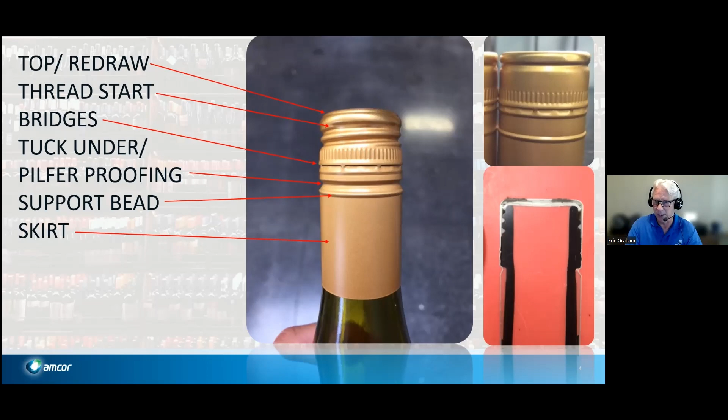Okay, now we'll get into a little bit of glass details. So in America, we have GPI. That's a committee of glass manufacturers all working together to make sure that they're working off the same specification. So the letter dimensions that I'm going to mention and the spec that I'm going to be referring to in this is the GPI spec for a 30 by 60 screw cap in a wine application.

There are many, many different glass specs for different applications and different size of caps. So this is by far the most common spec, and the 30 by 60 screw cap is by far the most common screw cap used in a wine application. So this is going to be geared toward that combination. Just to give you a general idea of what the specification looks like, the GPI 1680, that -3 is actually the revision number, and that's the newest revision that's out there.

You see that every dimension on the bottle has a letter designation assigned to it, and every one of those dimensions has a normal tolerance from the nominal dimension. And then on most of them, there's a second tolerance for maximum amount of ovality. So all of those things can affect the way the cap is applied.

A lot of where successful screw capping comes from is how well the cap is supported by the bottle inside it and how pronounced those details are on the bottle to give the cap something to hold on to as you're forming the cap around those details on the bottle.

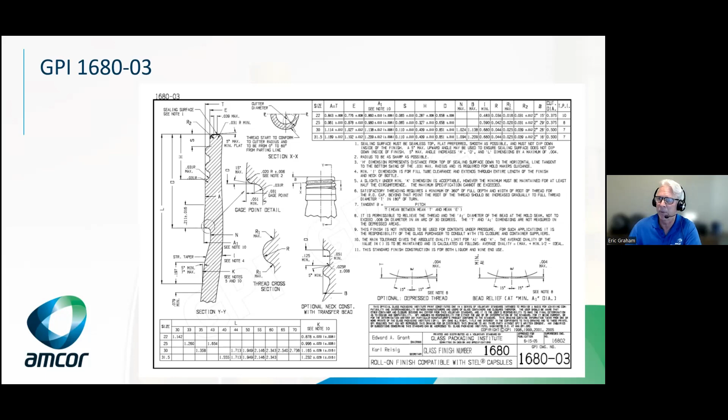So the S dimension, we mentioned the thread start earlier. So your capping head has the threading rollers set at a distance where the rollers are expecting to land directly under that thread start or S dimension on the bottle. But if you look at the GPI spec, the S dimension has a specification or a tolerance involved. So if your capping heads are set up a little on the tight side, let's say, or a little bit on the high side,

this is where you might see an issue where one production run, you have no issues, and then you change bottle or batch of caps, and then all of a sudden you're seeing cutting at the thread start. And that's because these details can move slightly. Typically, those tolerances are 8 or 10 thousandths of an inch, so they're relatively small. But if you're on the ragged edge of cutting and then something changes, then obviously that's where these type of issues show up.

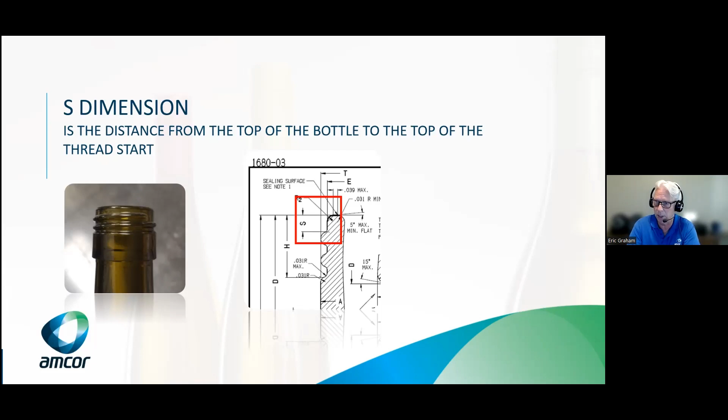So the next dimension is the D dimension. I'd say this is probably the one that glass manufacturers struggle with the most and cause our customers the most problems.

The D dimension is the distance from the top of the bottle down to where the tuck under happens. And so a lot of times this is what causes cutting in the tuck under groove. If that D dimension changes, again, your rollers are either too high or too low because the glass changed on you.

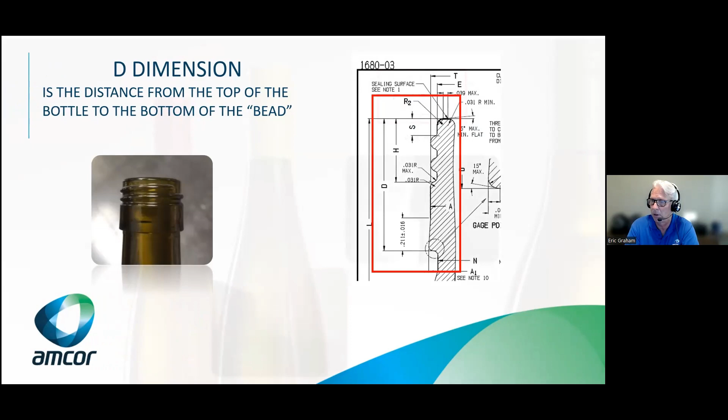Actually, I misspoke just a moment ago when I said the D dimension is the one that causes the most problems; the D angle is the one that causes the most problems. If you go back to the glass spec, they have a zoomed-in detail of this detail on the bottle. Basically, the D angle is the shelf that is formed for the cap to tuck under that ledge to hold the skirt onto the bottle when you open it.

When this 15-degree max dimension goes beyond 15 degrees, or this outside radius gets too rounded off, you can see on the right side of the screen an example of a picture from an optical comparator where that angle is well in excess of 20 degrees. It looks like 21, 22 degrees on the picture in the middle lower part of the screen.

What happens is no matter how well you form the cap and form that groove to lock it under the ledge, the bottle has provided a ramp for the cap to reform itself right back up and over that ledge. Instead of a nice square edge that the cap can hold onto well, that angle gets ramped out, and then you have what we call a pull-off. A pull-off is when you go to open the cap and the skirt does not stay locked to the bottle. The entire cap and skirt come off as one instead of the bridges breaking as they're intended to do.

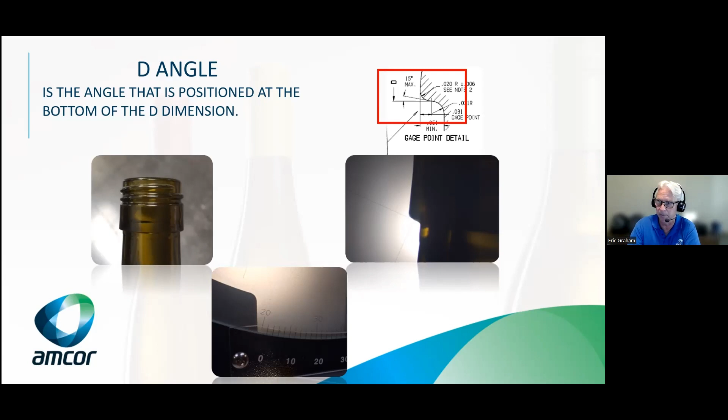The next one is the K dimension. This is a rarer glass defect or issue, but when it happens, a lot of times it catches people off guard and they don't properly identify it. If you see on the right, there's a pretty substantial gap between the neck of the bottle and the bottom of the screw cap where they meet.

That diameter of the neck of the bottle is the K diameter. In metric, it's 59.5 millimeters down from the top, basically the zone where the skirt of the cap meets the neck of the bottle. When that diameter is too large, it creates a lot of resistance that is felt in the opening torque; when you go to unscrew the cap, you feel that drag or friction created by the skirt of the screw cap being tight on the neck of the bottle.

Most people don't think about this, but when you start to open an aluminum screw cap, until the bridges break, the top and the bottom half turn together. So if that skirt is tight on the neck of the bottle, you feel that in the opening torque, the friction created by that neck being tight. So that's undesirable when it's too large.

In the extremes, the perforated part of the cap where the bridges are will actually invert, and the skirt will be tucked up underneath the cap, because when the cap is applied and all the downward pressure comes in from the top, the bottom of the skirt isn't able to scoot down the bottle. So the next weakest area of the cap is where that perforation is, and it basically just smashes the center part of the cap. Once you see it, you can't unsee it.

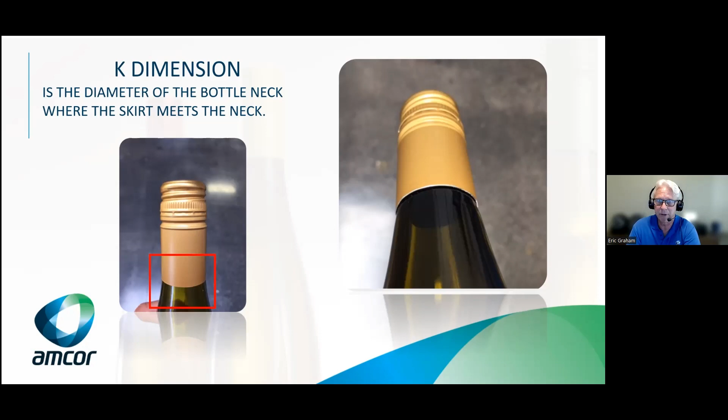When there's a K diameter issue, it almost always causes very high opening torques. The slip torque can be in the 20 to 25 inch-pound range instead of the normal, around 10. So it's pretty significant when this issue happens. On the other extreme, when the K diameter is too small, that can cause problems also, because the skirt needs support so the cap doesn't flex too much while it's being formed around those details on the bottle. If there's no support, the cap flexes, and then you can break bridges during application.

So, liner choices. Over the years, Amcor has developed many different liner choices, and this isn't even all inclusive. This is just talking about wine, not all the different versions available for spirits, which is a whole other category. Saranex and Saratin are by far the most popular. I would say Saranex is probably 80% of the liners that we sell in the wine market. The other close to 20% is Saratin, which is a tighter, lower OTR liner choice.

So you really have two choices, or two different ways of thinking as winemakers. If you have no concerns about reduction in your wine, or you know that the wine is going to be cellared for a long time, or if your winemaking style or your varietal is super sensitive to oxidation, then Saratin would be the most likely choice.

Saranex is a more breathable liner. It more closely mimics, I'd say, a general grade or a more normal middle of the road cork in terms of OTR. And so if you have concerns about reduction, or you know that this wine is going to go to market and be consumed relatively quickly, I'd say within a year or two, then Saranex might be a better choice, because shelf life isn't as much of a concern, and the liner choice can help correct some concerns of reduction.

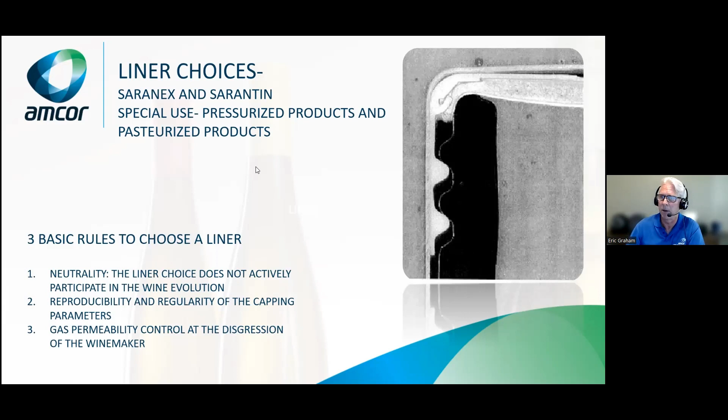Reproducibility of the capping parameters. So in other words, the thickness, the density of the foam in the liner, all those sorts of things, and the consistency of those, so that they're similar to a liner that you may be choosing or switching from. We need to make sure that that liner is compatible with your previous choice. And then gas permeability, so really OTR. Let me go to the next slide and see what else we have here.

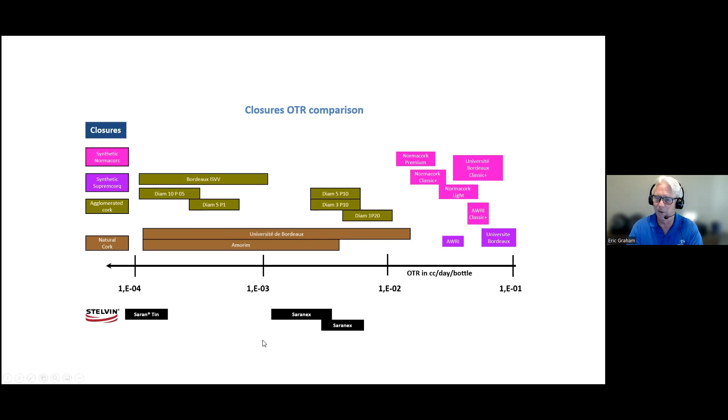Just to give you a general idea, this is using MOCON OTR testing equipment. And these are studies done by different companies, showing some of the more popular choices that are out there and how those closure choices measure up in terms of OTR. These ranges are in cc's per day per bottle. And you can see there two different testing facilities ranked Saranex right there in the middle of the spectrum of all those other common closure choices that are out there.

This is just to give you a general idea of what a Saranex spec sheet looks like. If you ever see the term SX liner, that is comparable to Saranex. We really shouldn't use Saranex because Saranex is a trademark name, and the liners that we are currently using are provided by another supplier that doesn't really own that trademark. So we're transitioning a lot of our literature away from Saranex and starting to use that term SX, just because we probably shouldn't be.

But you'll see here that Saranex liners do have layers of PVDC plastic embedded in the liner composition. There is some pending legislation in Europe that's been threatened for many years now to reduce the use of PVDC in food products. And so I don't think there's a slide on it in this presentation, but Amcor has developed a new line of liners called Stelvin Inside that are PVDC free. So if and when this legislation ever does go through, people aren't going to be stuck having no choices.

So we've developed an entire catalog of liner choices that have similar OTR to Saranex and Saran tin, and then we also have a step that's in between. So if we have winemakers on the fence trying to decide, well, Saran tin is too tight, too low of an OTR for my winemaking parameters, Saranex is not enough, we do have a choice in between.

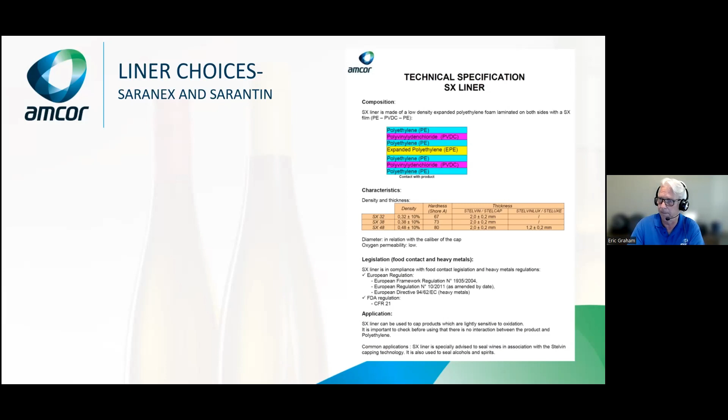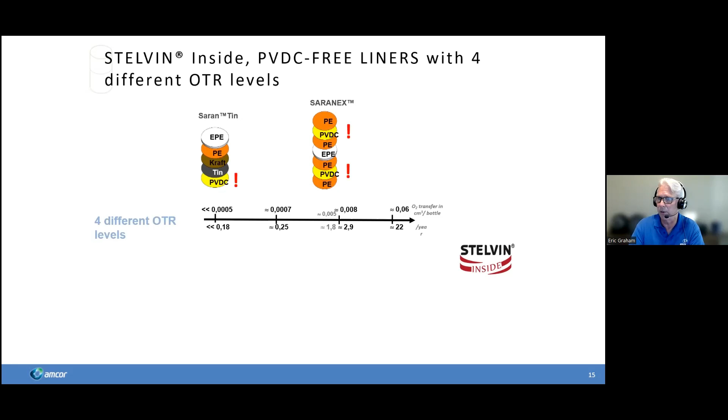Pasteurized and pressurized products. So I did mention earlier, oh, okay, we do have a slide on Stelvin Inside. Stelvin Inside, you have Sarantin, Saranex, and this says 4 different levels, but to be honest, the most breathable one we have discontinued because there was just no interest in it. We really didn't find any customers having any desire to use it, so we have just discontinued it and focused on the 3. One that's similar in OTR to Sarantin, one that's similar in OTR to Saranex, and then one kind of right in the middle. So the 7O2 is the one that's been discontinued.

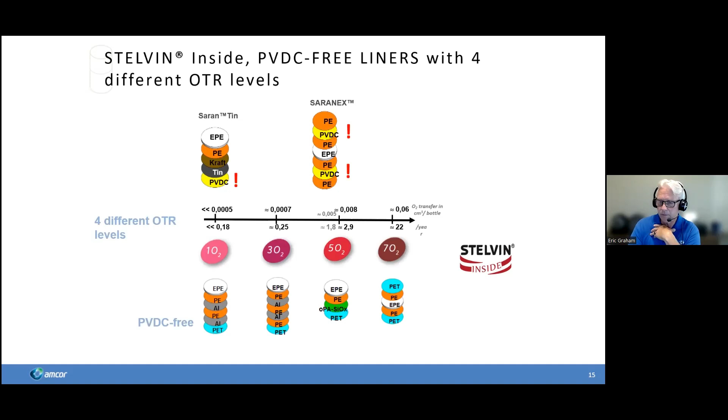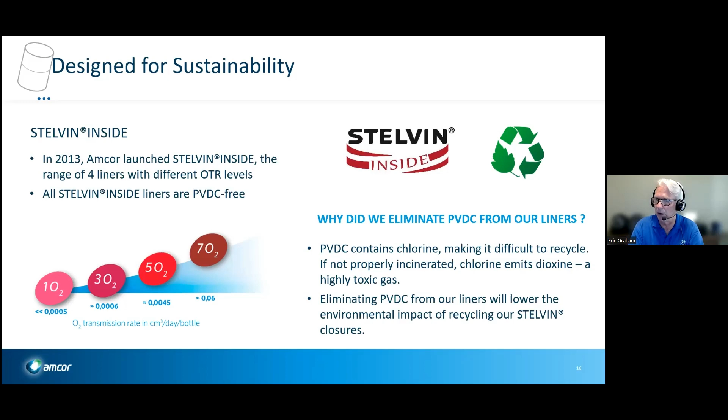And again, the important thing about these are the elimination of PVDC. The reason that people are looking for the removal of PVDC in food product has a lot to do with the environment and recyclability. So when a screw cap is recycled, people aren't going to pluck the liner out. They basically just incinerate the aluminum, and the liner that's inside it is obviously incinerated at a much lower temperature than aluminum, and so it just burns off and goes away. The PVDC component, the C in that is chlorine or chlorides, and so it emits a very tiny amount of chlorine gas, a toxic gas. So obviously people are looking to avoid that, and it makes sense.

But it's not only that. We need to know certain parameters about the screw capper also. So there are devices for measuring top load or vertical pressure. That's the pressure exerted by the capping head to the top, compressing the seal properly against the top of the bottle. And devices for measuring the pressure on the rollers that are forming the cap around the details on the bottle. So your 2 threading rollers and 2 pilfer or tuck under rollers. We measure those so that using the visual inspection, knowing what the application settings were, and including torque testing, we have much more confidence that the cap was applied properly.

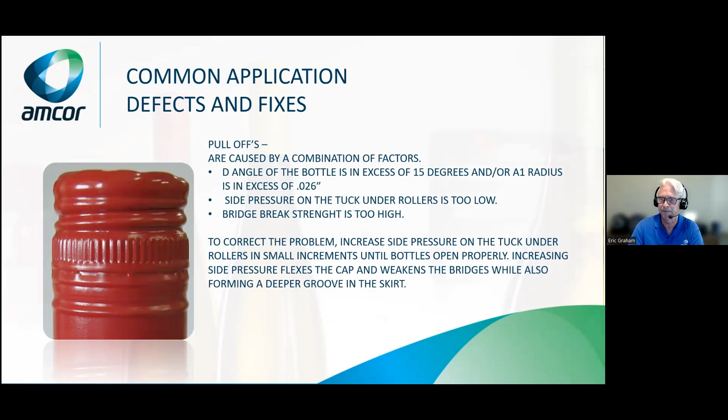Spinners. Spinner, again, this kind of goes back to nomenclature also. So I have found that sometimes people will call what I call a pull-off a spinner. So if you're calling me looking for troubleshooting help, I'm probably going to pick your brain a little bit and dig a little deeper instead of just trusting that we're using the same nomenclature. So on the pull-off, some people call those lifters, and then they call a spinner a pull-off. It gets confusing. So again, I'll dig a little deeper.

But in my definition or my opinion, a spinner is when the threads are poorly formed, but the tuck under is good. So as you go to open the bottle, instead of the bridges breaking, the threads fail. And now you have a cap that just spins on the top of the bottle and will not open. The only way to open that bottle is to physically hold the skirt and hold the cap and twist in opposite directions to mechanically break the bridges, or get a knife out and cut the cap from the top of the bottle. Either way, that's a horrible experience for your customer.

So we have tests to test for this during the quality torque testing phase that will give you some confidence that you're not going to be sending spinners out into the market. In addition to that, we go back to the visual. So if the thread is formed well visually and you're getting good strip torque performance when you're doing your torque testing, this is where you have confidence that the cap is not going to strip out when the customer goes to open it. Many different things can cause spinners.

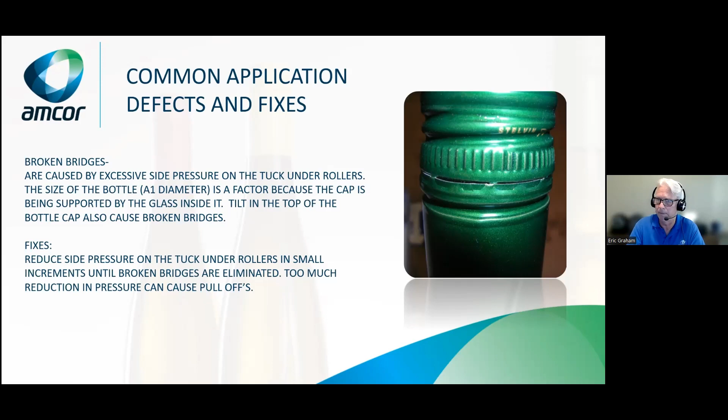Cutting in the tuck under, this is another relatively common one. And this kind of goes back to, actually, I don't know if I mentioned this, just kind of how the capping process works. As the capping head comes down over the capped bottle, the pressure block is the part that actually makes contact with the top of the bottle.

That part compresses the seal, forms the redraw or that ring in the top of the cap, creating the top and side seal. While the liner is held in compression, then the 4 rollers, the 2 threading rollers and the 2 pilfer rollers, will start to form the cap around the details or the thread and the tuck under on the bottle.

Theoretically, even if one of your pilfer or tuck under rollers was too high, because it makes 2 full revolutions around the cap, you should see a cut that goes all the way around the circumference of the cap. Realistically, in order to do that, your roller has to be very, very high, way too high, to the point where somebody has probably got in there who didn't know what they were doing and made a very coarse adjustment to cause this.

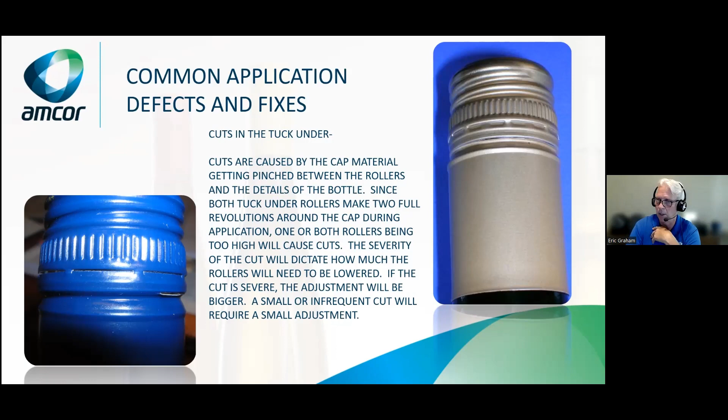So the visual inspection. So I think I have some animation on here. Nope. Let me go back.

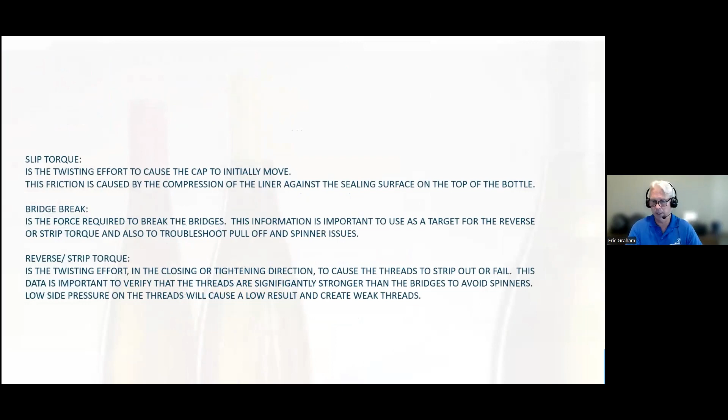The visual inspection, starting at the top and working our way down. Again, you have the redraw. That's that ring that's formed at the top, creating the top and side seal. You're probably used to seeing what that looks like on your capping equipment. Different manufacturers can make that look slightly different. So if you're looking at bottles on a supermarket shelf, let's say, or in the wine shop, and you see some that look more defined or less defined than others, it can just be by manufacturer. It can be by the amount of top load used.

And if people are in the habit of fudging their machine height up and down to cure capping problems, the manufacturer gives you one way of setting your machine height, and that is where the machine should be set. There is no troubleshooting step where you raise or lower the capper. When you raise the capper or lower the capper, let's say you're cutting the threads and you raise the capper, just 1 or 2 millimeters, maybe 3 millimeters. What you've really done is you've reduced top load. So now you're not compressing the seal properly anymore.

You've potentially reduced side pressure on all 4 rollers because now the rollers aren't being drawn in full strength. So with the spring adjustment that you typically use to adjust pressure on the rollers, now you've adjusted all four rollers to correct just one problem. And you've also changed the timing of when the rollers engage the cap and when they disengage from the cap. So you've changed everything about the capping concept to correct one problem. And it can work. Don't get me wrong, it can work. It's just not the right thing to do. So I highly discourage people from doing that.